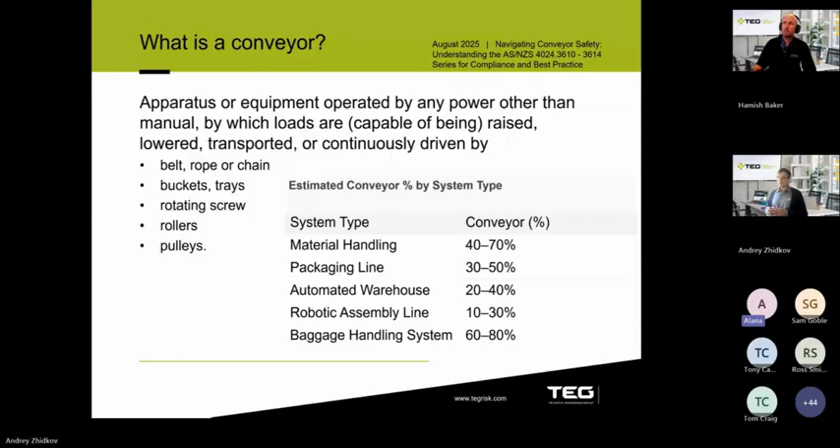Just a brief on the standards, most of you are probably aware. In Europe there's Type A, Type B, and Type C standards, whereas in New Zealand there's Part 1, Part 2, and Part 3. Conveyors fall under Type C or Type 3 standards.

These are the machine-specific standards. In terms of the hierarchy of standards, these are the ones you would typically utilize as a first rule of thumb, or rather, the first measure.

So the standard hierarchy, essentially we're going to be talking around 4 standards. The key one is 3610, which is an overarching standard with all the general requirements. There are 2 standards to be used in conjunction with 3610: the bulk material handling standard, and 3614, the mobile and transportable conveyors.

The latest release of 3612, in rather seismic manner, has been completely decoupled from 3610. Now it provides a bit more detail - we're going to go through each standard individually. The standard, even in terms of the volume of pages, rose from 70 pages to 170 pages within this limit.

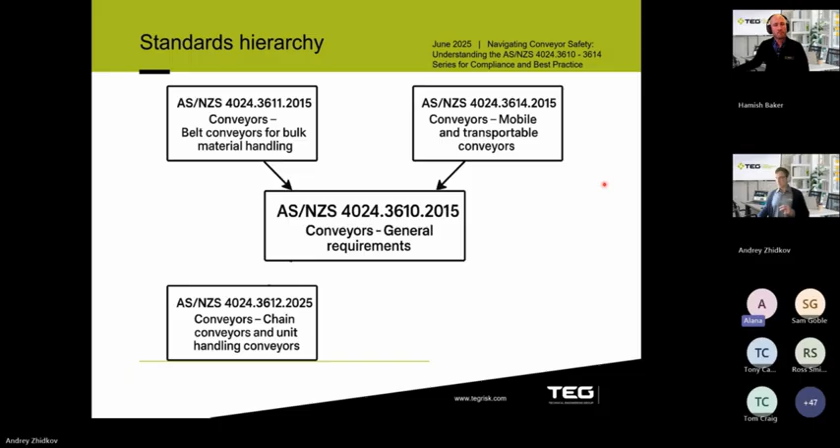So the standard objectives - if we were to utilize 1201, it's essentially achieving the greatest risk reduction, risk mitigation. We're looking at the machinery throughout its whole life cycle: transport, operability, commissioning, maintainability, decommissioning, disposal. And 3610 actually highlights that you have to start off with the risk assessment to minimize the risk as part of the risk reduction.

The persons affected are essentially those in the vicinity of the conveyor. The key here is to involve all parties throughout its life cycle, so all the stakeholders, to identify what the hazards are and all the risk reduction measures, essentially following the 1201 three-step iterative method.

So for conveyor hazards, particularly for bulk material handling, you could find most of it in Appendix D, which has a bit more detail in terms of what the hazards are. You could also go onto the WorkSafe website - there's a topic around guarding of conveyors that also provides some guidance in terms of the hazards.

A recent incident involved a 23-year-old operator carrying out unplanned maintenance, which resulted in the person being killed. This resulted in fines of 800,000 in penalties. It may not look to many that this is a fatal risk hazard, but that conveyor set up resulted in a fatality.

So it just reiterates the potential significance of the hazards we're dealing with. For people with conveyor setups like that, it's definitely worth making sure you have a robust risk assessment in place.

I'll reiterate, we're going to go through this, but essentially, particularly for bulk material handling, the stopping time could be minutes. So if you're reaching through the chain and so forth, even if you can actuate an e-stop, it still takes some time for the rundown, for the conveyor to go from stopping to being fully stopped. That's the key hazard associated with bulk material handling, at least.

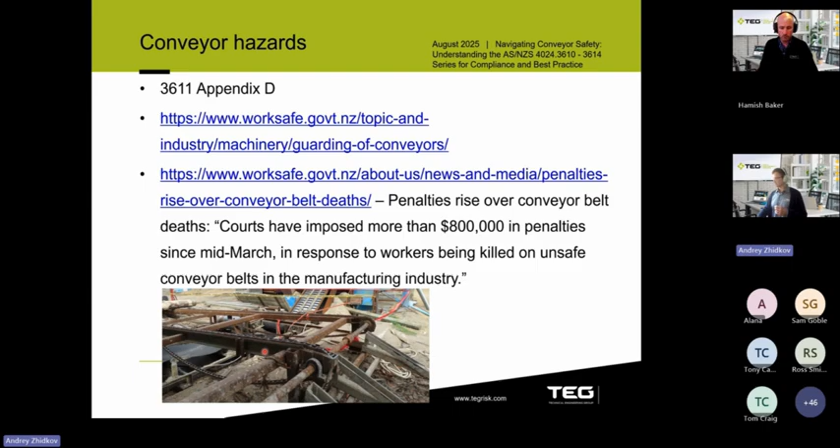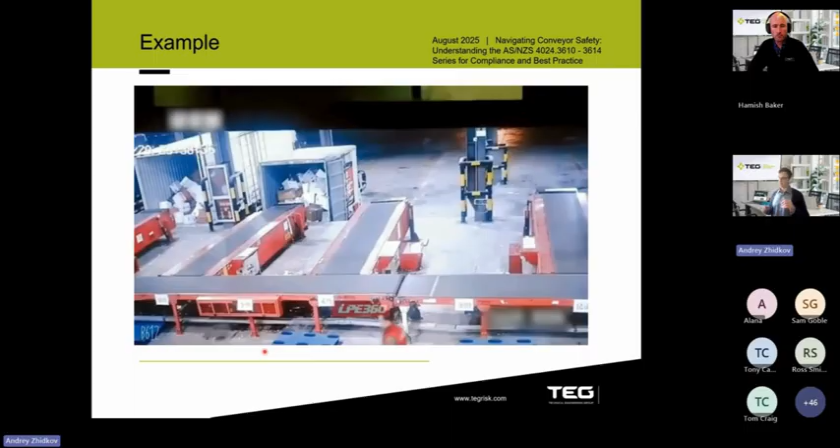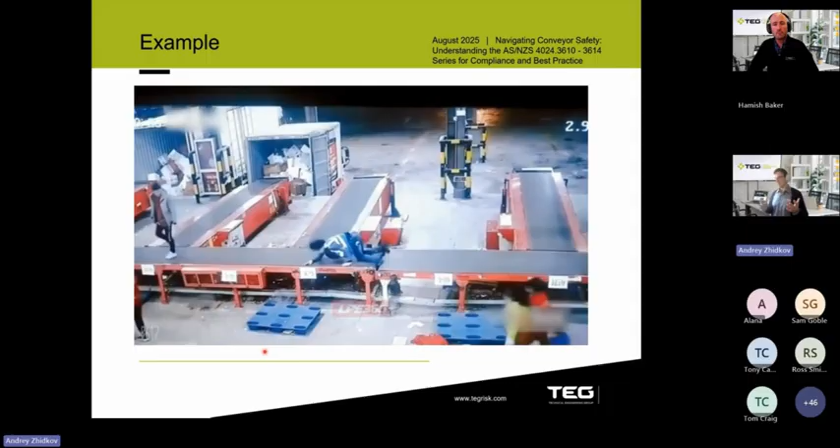This is a bit of a crude example, but essentially you can see two conveyors running towards each other, with people walking near the conveyor. Even disregarding persons walking the conveyor, this could involve loose clothing or long hair - you could see the feet of another person being caught between two conveyors, which could lead to broken bones and so forth.

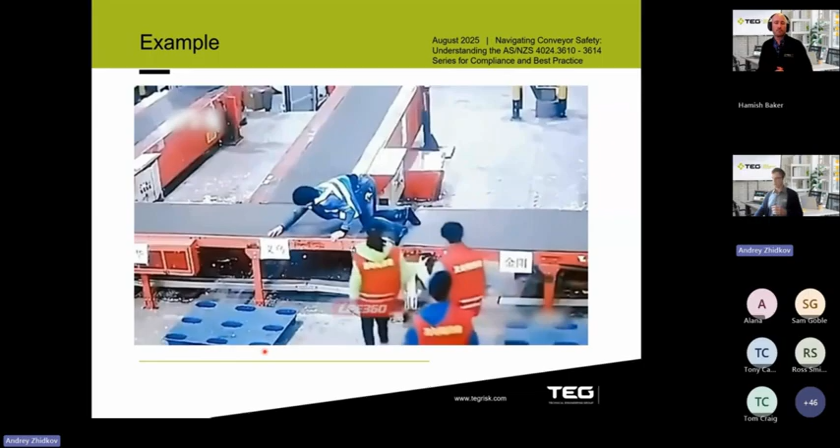So risk mitigation requirements are essentially the same as 1201, as part of the 3-step iterative method. You go through inherently safe design measures, then safeguarding - essentially fit for purpose and preventing access to the danger zone.

The danger zone is any zone within or around the conveyor in which a person is exposed to unacceptable risk of injury or damage to health. That's key to identify, because in further slides we're going to go through the particular risks identified with the danger zones. And the other one is complementary protective measures.

These are essentially emergency stops, pull wires, and so forth. These are the complementary ones. And there are some specific conveyor controls that we're also going to touch on, particularly applied to 3610.

That's all around the startup, essentially warning startup and so forth. And the last one is the energy dissipation and isolation. This is more around the end user. Essentially, it describes what the end user needs to run, any SOPs that apply to an end user.

Sorry, Andrey, I was just going to say to the team here, it's probably one of the interesting attributes of the ASNZS 3610 series of standards, excluding the one that's just come out, is it actually goes into a bit more information on end user information. A lot of standards previously, particularly those of European origin, are more machine builder focused, but there are actually listed requirements in these standards around how end users should operate them safely as well, which is a little bit different.

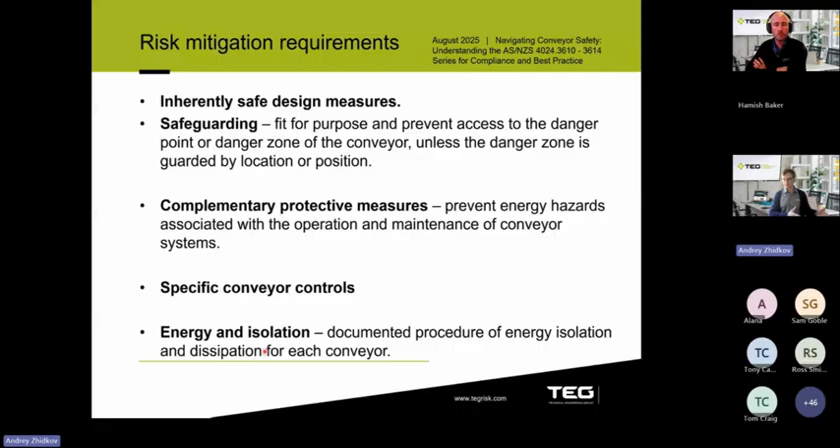So the hazardous situations essentially involve a person reaching into the hazard zone. These are the key ones, associated with the risks of reaching into the danger zone. As per the previous slide, we discussed what the danger zone is, and other parts of the body becoming caught or entangled, or in contact with the danger point.

We're going to go through and describe what the nip or shear points are on the conveyor, and what other measures can be taken to mitigate the risks. You can find all the other hazards associated with conveyor systems in 3610 as well.

I think Appendix D gives a list of hazards, and the point here, which we touched on earlier and want to reiterate, is that they are significant. You can look at arm amputation level, and even, as we showed with that photo before, fatal risk hazards as well, subject to the construction and nature of the machines.

They are certainly not medium level hazards. And then just to add to this, particular considerations need to be made for long hair and loose clothing, as per that previous crude example video.

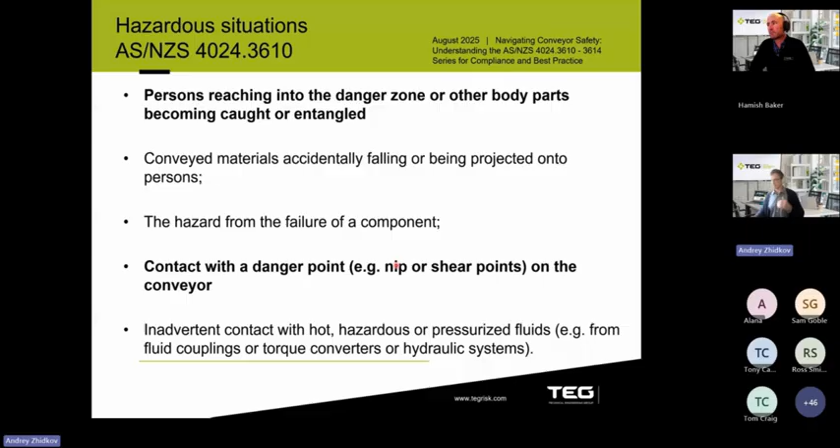So the hazards, essentially nip and shear points: if the conveyor is positioned less than 2.7 meters above any access level, and the gap is between 5 millimeters and 120 millimeters, that essentially creates a nip or shear point. And rotating parts, any exposed rotating shafts and other parts like sprockets, are also rotating hazards, along with gaps and shaft couplings and so forth.

Those two numbers are interesting when we get to the later standard 3612, that's where you'll see some differences. If you clock those numbers, you'll see something different come up later. We're going to go through this as well, particularly around nip or shear points and nip guards, and it will become more apparent why it's important to pay attention to those 5 millimeter, 120 millimeter, and 2.7 meter figures.

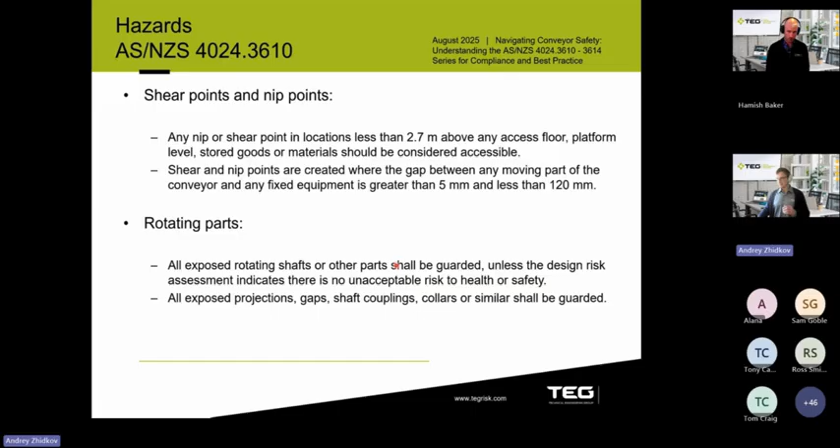So the design of the hazards: obviously restrict access to danger zones where needed for routine activities like lubrication, servicing, and testing. Safeguards need to be designed to minimize reasonably foreseeable misuse or the possibility of defeat in particular. And the guard and protective devices shall be designed to be suitable for the intended use. That's key as well.

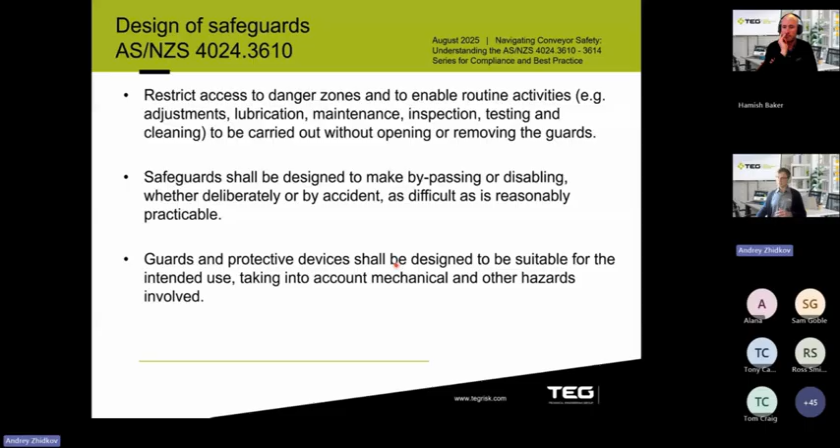These are the requirements and the hierarchy of safeguarding methods. Essentially, the first one you would go for is permanent fixed guards for infrequent access, then interlocked physical barriers for maintenance, operation and cleaning, then removable guards for planned shutdown, and presence sensing safeguarding systems like curtains and safety systems. These are essentially information for use, policies, SOPs, and so forth, that you have in place, along with warning signs and danger signs.

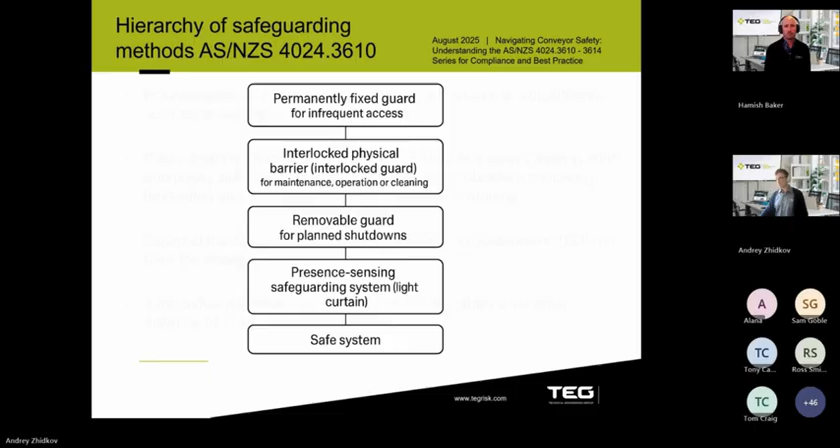The guard design - essentially there are a lot of provisions that need to be made. Guards shouldn't need to be removed for regular lubrication and adjustment, so in some instances you need to look at provisions for placement of remote lubrication points. If you look at chain conveyors with slave drives, you have housing for the slave drives with openings and caps - you can easily remove the caps and access the hazards. So you need to look at remote or distance guards to prevent reaching through into the hazards.

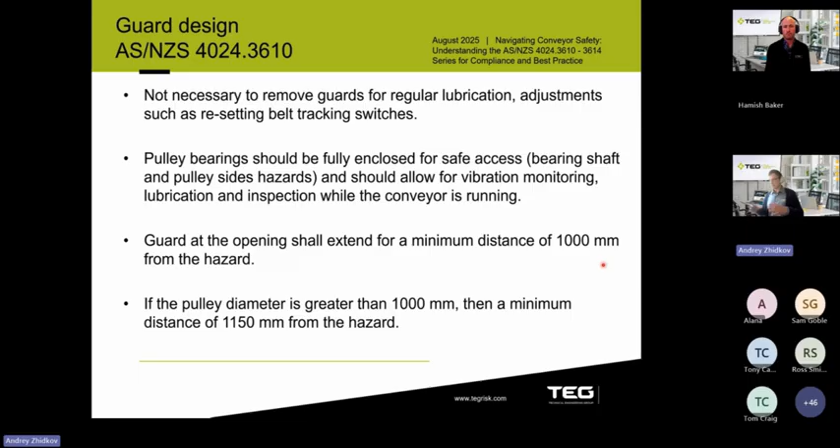Pulley bearings, essentially, need to allow for vibration monitoring and so forth. And the guarding distance at the opening - the key here, the most important part to memorize, is this distance: it's 1 meter minimum distance from the hazard. And if the pulley diameter is greater than 1 meter, then the minimum distance needs to be 1150. You're going to see in comparison with 3612, the latest revision, that there are some deviations being made in relation to 3610.

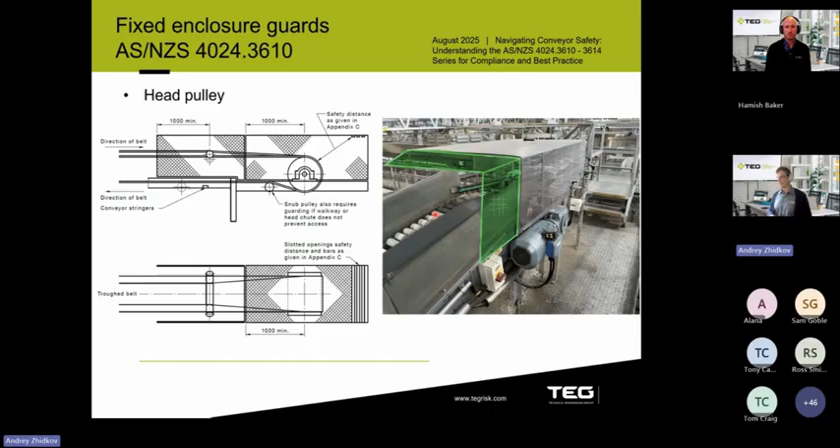A couple of examples: fixed enclosure guards or tunnel guards. Essentially, you can see there are two hazards here, the pulleys, and the guards are positioned 1 meter away from the hazards - you can see this from the top view as well. So these are the locations - essentially that's how you design: you identify what the hazards are, and then you design the guards. You need to look at the opening for other trays and so forth - these are the key requirements here. The same applies to tail pulleys as well, also 1 meter away.

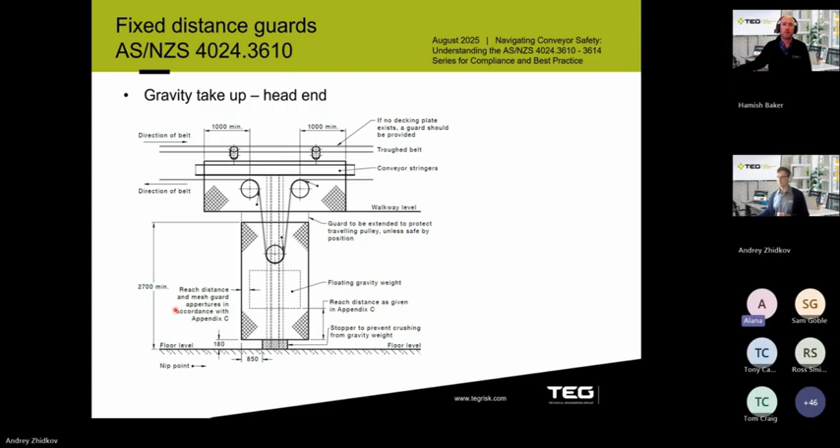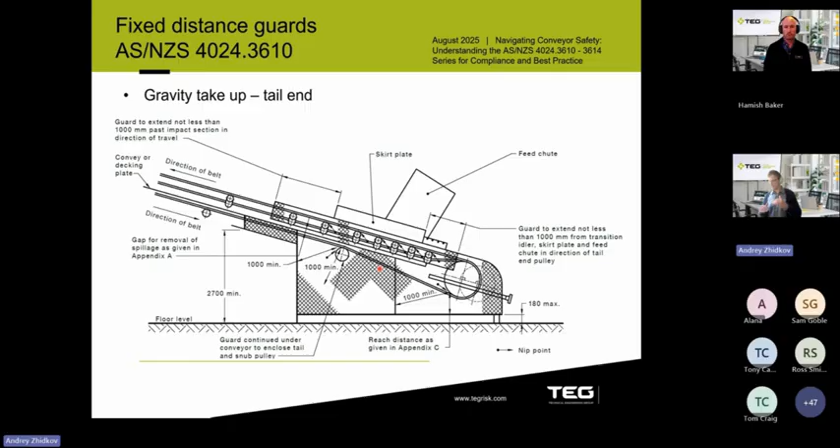Thank you, Hamish. So the same applies at the tail end as well - you can see it's also still 1 meter, and the height of the fixed guards and the gap is also 180. Essentially, you need to maintain this 1 meter rule throughout all your fixed guard designs, as well as the gap from the floor level to the lower edge of the fixed guards.

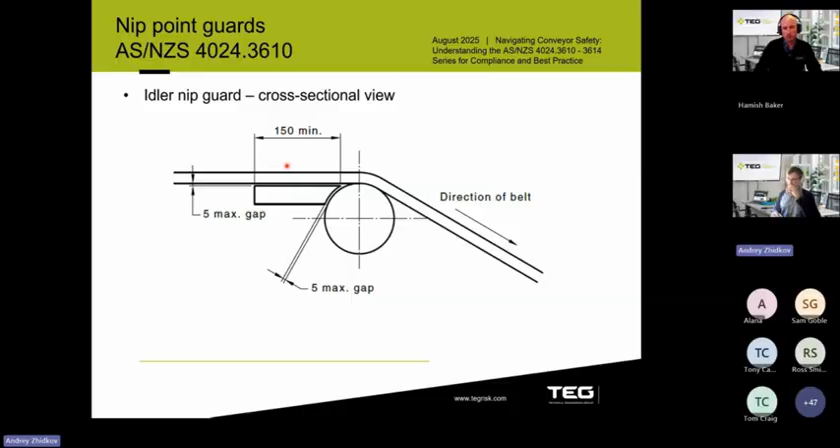Now we get into the nip point guards - you can see the design. Again, we're maintaining this 5 millimeter rule as well. You can see it even provides more guidance on how deep the nip guard needs to be, and we're still maintaining this 5 millimeter gap. Obviously you wouldn't use nip guards for cleated conveyors because they're not suitable for cleated conveyors, as well as for chain conveyors - but we're going to go through a particular example for chain conveyors further down the slides.

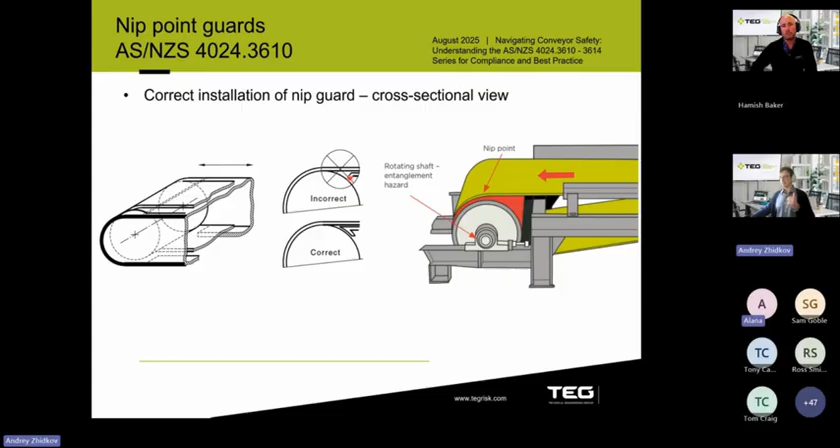And then we can see the cross section as well - this example is from the WorkSafe website. You can see here is a nip point - the conveyor is traveling in this direction, and you can see the shaft, and that's where the nip point is. They show what the correct design for the nip guards is, and what the incorrect design for the nip guard is.

So a couple of examples here - you can see the direction of travel, and you can see the different types of nip guards you could utilize. In this particular example, you can see that the belt is partial width, and that's the key to note, because the belt could be partial width, but then the nip guard is also partial width - so it doesn't extend all the way through the head roller or tail roller.

Essentially, as the belt travels along the shaft and the roller, it could potentially be exposed to the nip point. So in this instance, you would look at using a full nip guard.

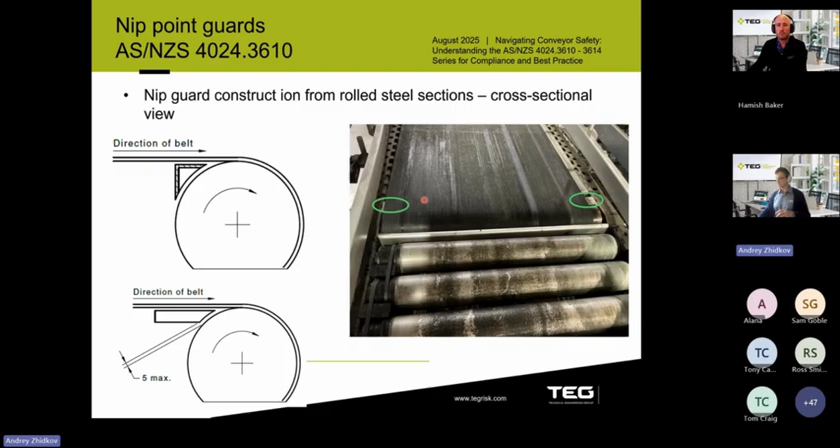So you can see this is an example of not having any nip guards. You can see the belt is traveling in this direction, and that's the nip point. The idea here is to either have a full width belt with a partial nip guard,

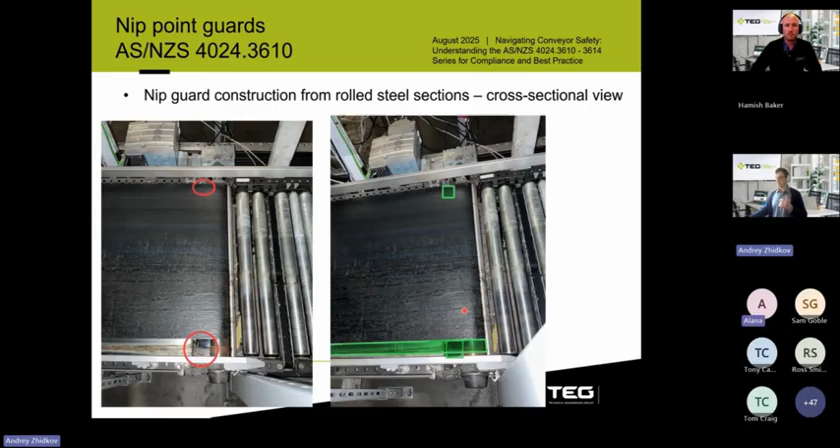or a full nip guard and leave the belt as it is. Then the guard alternatives - the key here is the pop-out, like the standard describes the pop-out rollers. Essentially they need to create a gap of 120 millimeters to allow arm withdrawal, and a 5 millimeter gap here, or using the dead plate.

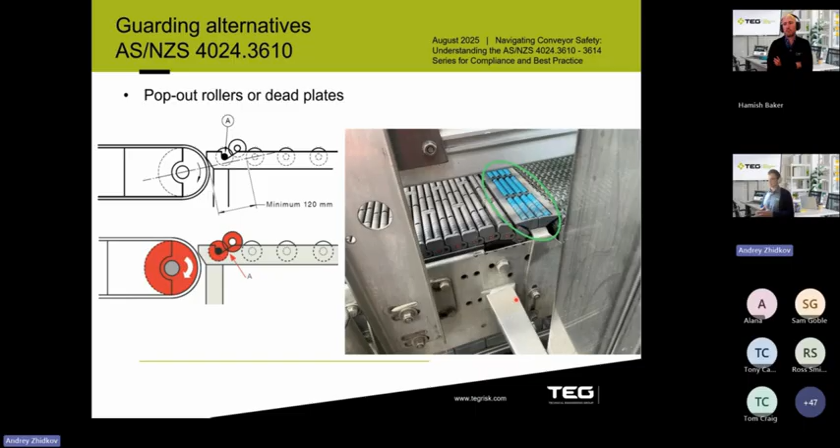But the other thing to note here is 90 degrees - essentially they need to sit perpendicular to the belt. It'll be more apparent when we look at 3612, why 90 degrees is actually different.

So that's one for you to memorize, because we're going to go through and look at 3612 and see what the deviations are there as well.

Emergency stops within the conveyor standards is a really detailed and explicitly set out set of requirements. We'll share the PowerPoints with you, but if you have any sort of decent portfolio of conveyors in your business, or it's something you build or manufacture, you want to make sure you have access to these standards, because there's a lot of specificity in there that we just can't cover in this full webinar.

Sorry, Andrey, go ahead. Yeah, thank you. As Hamish said, this conveyor standard is quite onerous in terms of the emergency stops and the pull wires.

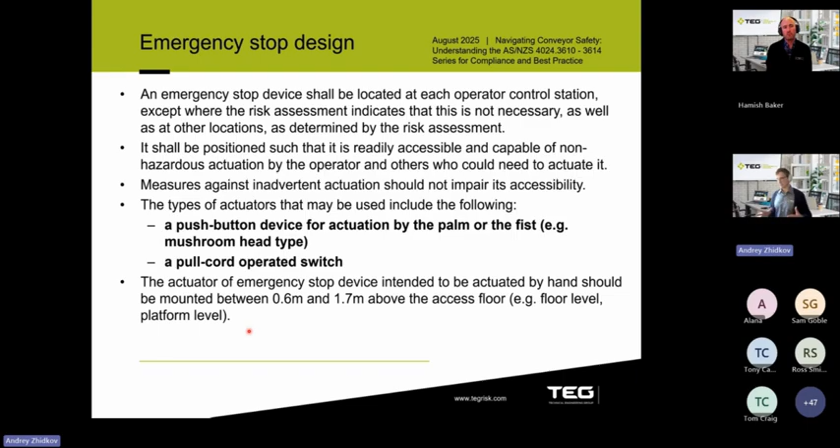So that's kind of highlighting the location of the emergency stops. The most common example you see is for a conveyor greater than 2.5 meters in length and located less than 2.7 meters - they need an emergency stop required at head, tail, and the drive, and at intervals not exceeding 30 meters.

Then there are some other types, like when it's less than 2.5 meters, then only one emergency stop is required. And when the conveyor line is higher than 2.7 meters, emergency stops are required every 100 meters.

You'll see later on why that's the case for the upper limit as well. That's also important for you to note, and every 100 meters as well. If it's higher than 2.7, essentially you need to require an emergency stop. It needs to be readily accessible and visible.

If you're talking about an e-stop at the head, tail and drive ends, if you're in an industry with long conveyor runs, that might not be particularly onerous, but when we go into some processing sites or FMCG sites, there are conveyors going everywhere, and every new conveyor has a head, tail and drive end.

All of a sudden it's like, gosh, we've got to have e-stop coverage everywhere. Now, pull wires might provide some economic means to get there, but it does create real standards and technical compliance issues with trying to meet that geometric requirement of how they're spaced. So yeah, really challenging to conform to that particular standard, in some cases.

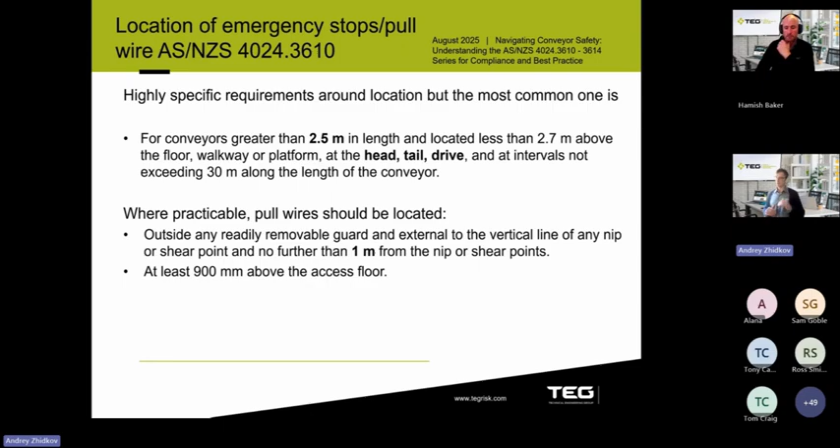In terms of the pull wire location, it needs to be located outside of the readily removable guards, and not located further than 1 meter. We're maintaining this 1 meter as per fixed guards as well, and it should not be mounted lower than 900 millimeters, and generally no higher than 1.5 meters, as we can see here.

We're going to see on the other slide the ideal location of the pull wire, and obviously it needs to be clearly visible. You need to also take into consideration, depending on the run of the pull wire, sometimes you could utilize labels highlighting what this is, a pull wire and so forth. And the pull wire design, that's the one for you to note here.

It will be the pull force, so essentially 70 newtons. From memory, the predecessor of 3610, AS 1755, the pull force was 120 to 140. That's the pull force, but now it's been reduced.

Well, it's been reduced since 2015 to 70 newtons. And the other one is 300 millimeters, essentially the travel distance of the pull wire, and this should not exceed 300 millimeters. It's between the support structures, the maximum spacing. So the other one for you to note is 6 meters, essentially between the pull wire supports, whether you use eye bolts or any form of hoops, but essentially you should maintain this 6 meter spacing. This is particularly to achieve the required pull force and travel distance.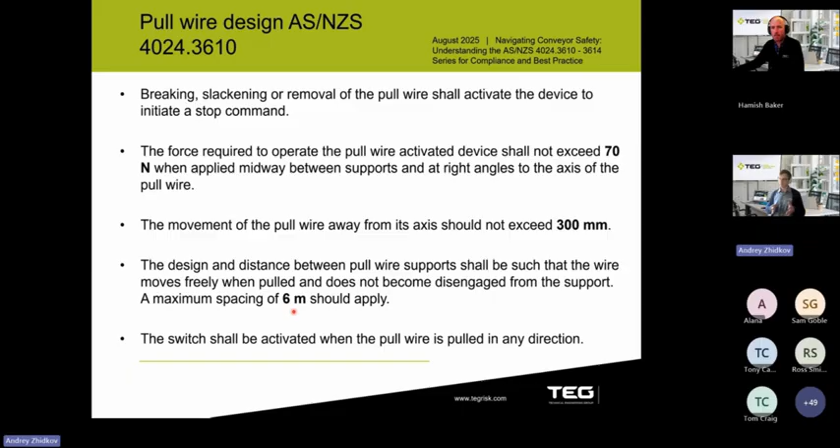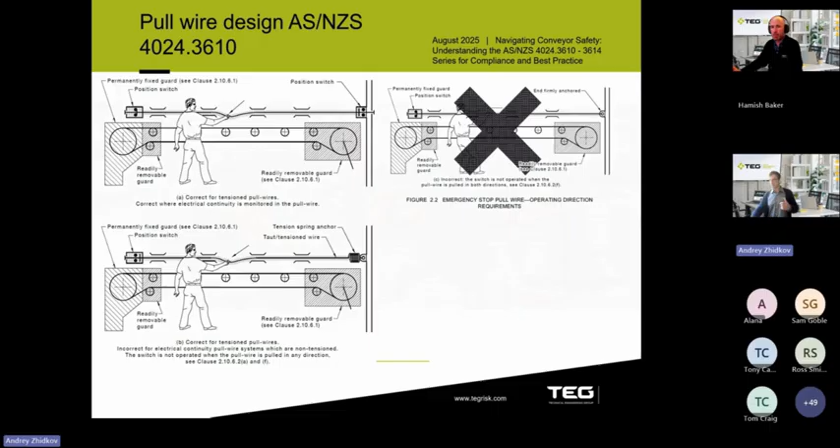So you can see a couple of examples here. We have 2 switches on both sides, or there's going to be a tension unit and the spring, and that's the incorrect mounting. You can see there is a firm anchorage. The downside of this is, as you can see here, if you were to pull the pull wire, you will have to actually undo the tension unit and then reset it, and it becomes quite cumbersome. This discourages operators or personnel from actuating the pull wire, because it's quite a rigorous task to reset it.

And then this is around a 12 meter run, and then there are no supports here. That's essentially where you would probably say that the travel distance and the pull force of 70 newtons is not maintained.

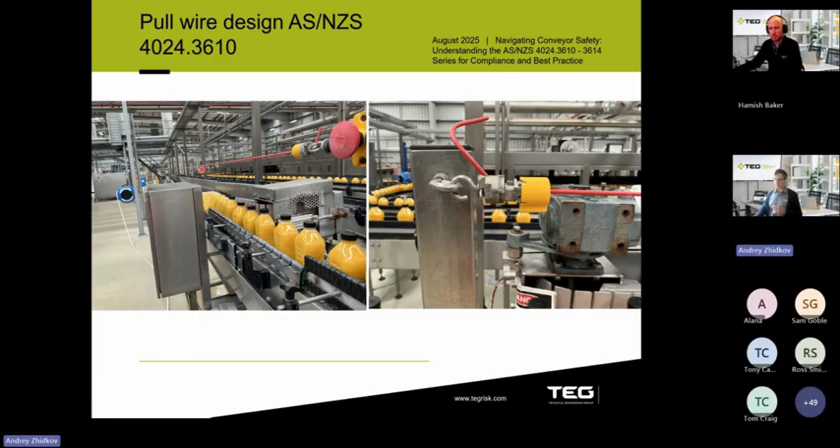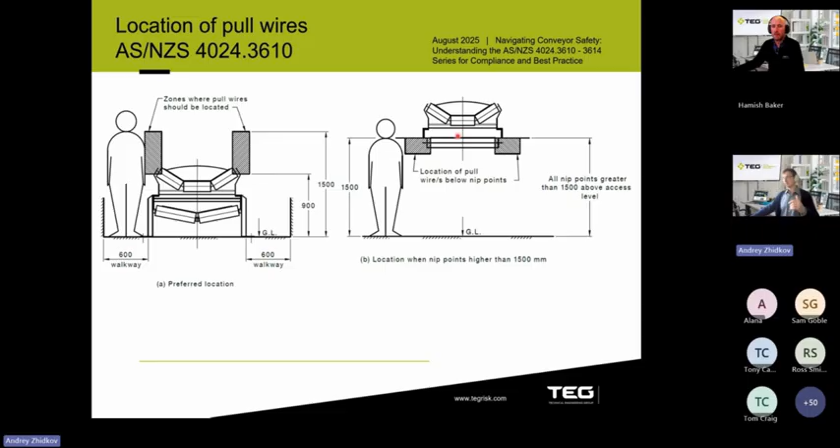So that shows, as previously discussed, the height. Essentially the lower one is 900, and you need to mount the pull wire between 900 and 1500. And when the conveyor is higher than 1500, you mount the pull wire lower than the conveyor line.

Conveyor controls, that again comes down to the end user. The key here is around having uniform start and stop controls. You may look at the conveyor starting and stopping at the same time, but then you don't take into account that there's a conveyor group starting and stopping simultaneously. But then as part of the cascade stopping and cascade starting, that's where the nip shear points are created, and that's what to consider. Sometimes they start synchronously, and therefore there is no need for any form of nip guards or safeguarding. But that's a really good point there.

I think there's one question that Alton asked, and I think it's maybe timely to bring it up. It was around, do we still need e-stops required at head and tail end if the nip point is guarded?

Andrey started talking about a point there. You might actually have 2 conveyors, and do they start synchronously or not? It may not be as simple as that, because you might have 2 conveyors with slightly different belt materials, which creates different differential forces. One travels in, the other one might start later, so it pulls in a force that way. So that alone may create that hazardous situation that might require e-stop protection.

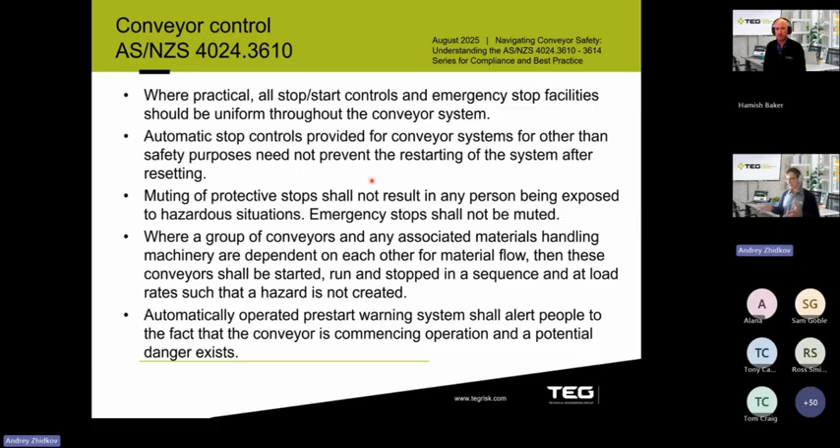I don't know if you want to add to that particular question from Alton, Andrey, around the wording in 3610, and we're going to get to 3612 later on. But in terms of e-stops at head and tail end under 3610, are they required if the nip points are guarded? Yes, that's what it says, it says 'shall be'. So essentially, even though they're safeguarded, you still require them. And the other one is the pre-start warning system as well, to alert the people, which is very onerous, as we touched on before. But we'll get to 3612, which sort of sets the cat amongst the pigeons.

So energy isolation, that's the other one. Essentially it's more of an end user requirement for the isolation. So essentially, for any form of maintenance, inspection, or servicing, that's when you need to perform any lockout, tagout procedures.

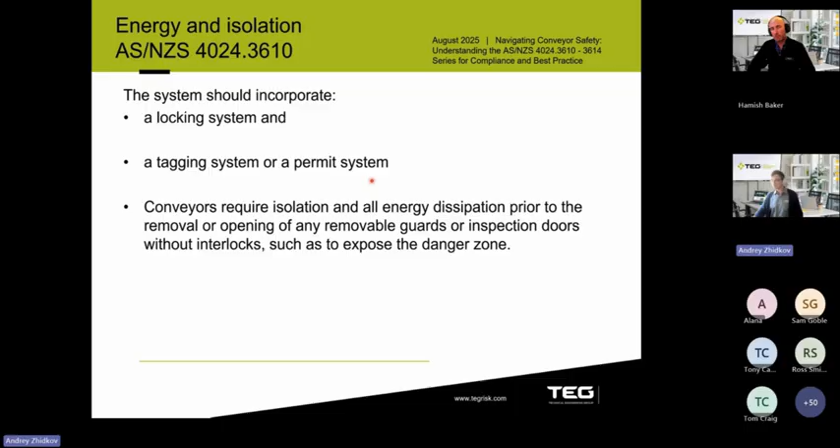So maintenance management essentially comes down to the end user. These are the periodic tests and inspections. You need to make sure protective guards are functional, typically carrying out tests in accordance with manufacturer recommendations. Also check for undue accumulation of spillage and excessive rubbing. These are periodic inspections you need to identify as part of your procedures, including making sure pre-start warnings are functional, and the noise as well.

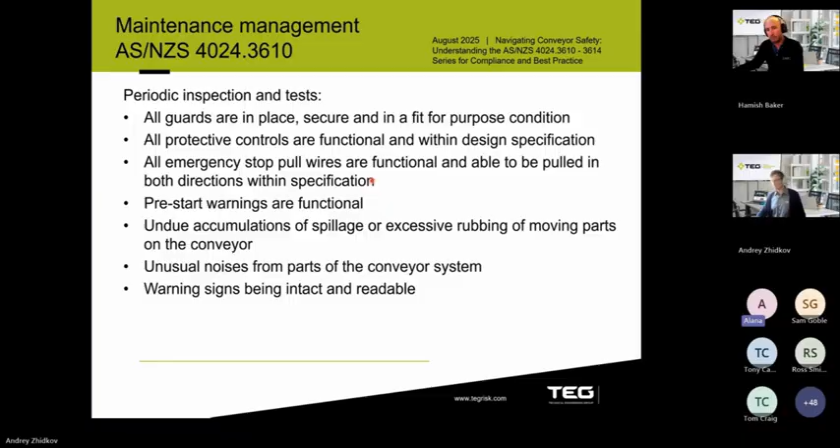Going back to that point, it's interesting to consider that this machine safety standard is actually telling the end user, which is unusual for standards coming out of Europe, but this was Australian developed, the inspections and tests you should be doing on your conveyors. It's almost starting to move towards a code of practice, saying these are the things you should be checking, and it's quite specific. Some are relatively generic, but there's a whole bunch of things there, so I would put some relatively onerous compliance points on there. That's something for you to consider if you want to achieve compliance with that standard. Something a lot of people don't appreciate about that standard.

So the next standard is around bulk material handling. What is bulk material? Essentially coal, ores, grains - these are the bulk materials. All bulk material handling introduced the need for conveyor safety standards. Most of the mining standards, 3610 and 3611, 12 and 14, are essentially derived from mining.

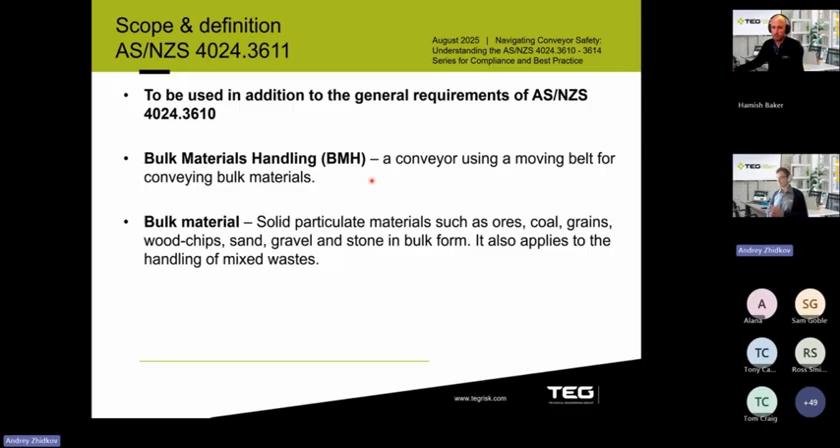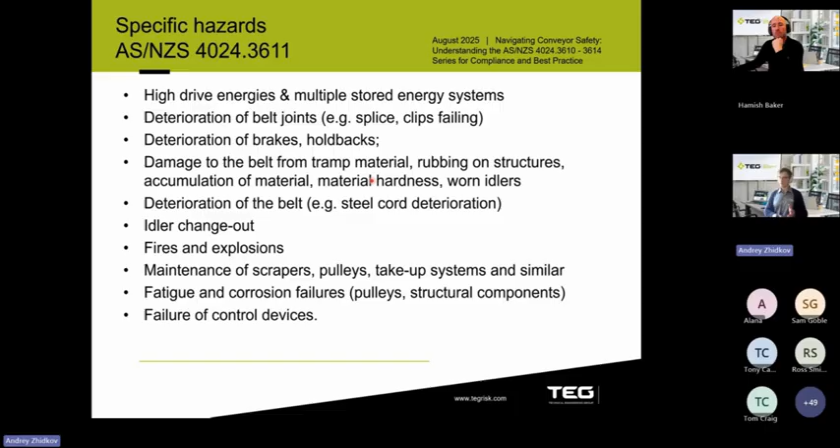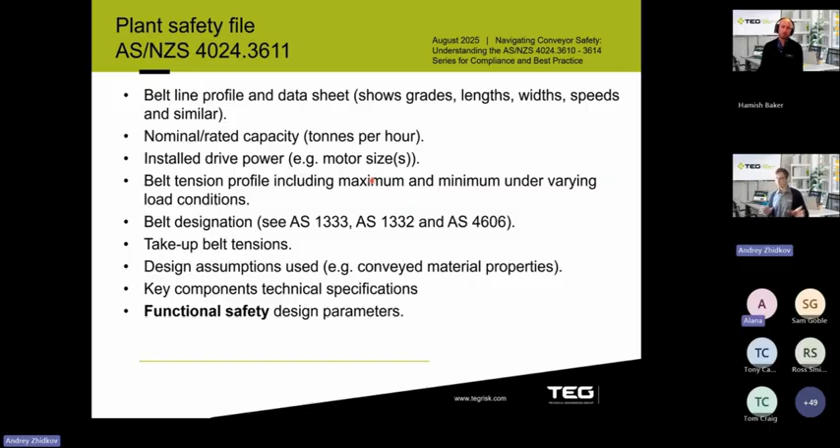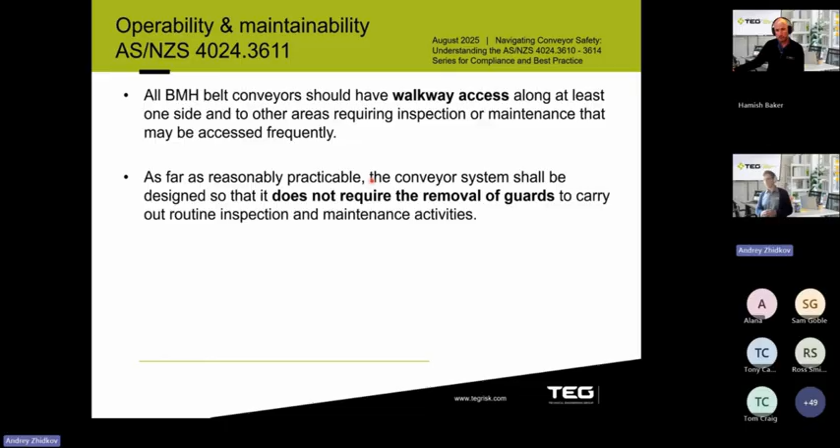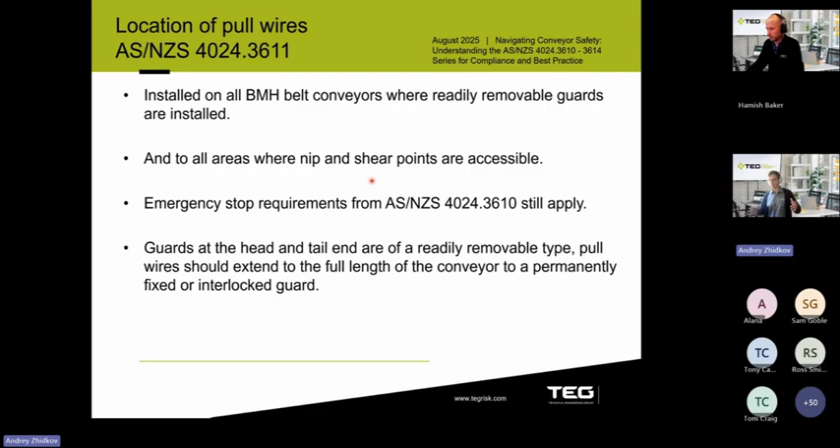Location of the pull wires - essentially the emergency stop requirements still apply from 3610. Because of their head and tail, they typically require removable guards. So if you were to use a pull wire, that's when you would stop prior to that on the permanent fixed guards or interlock guards.

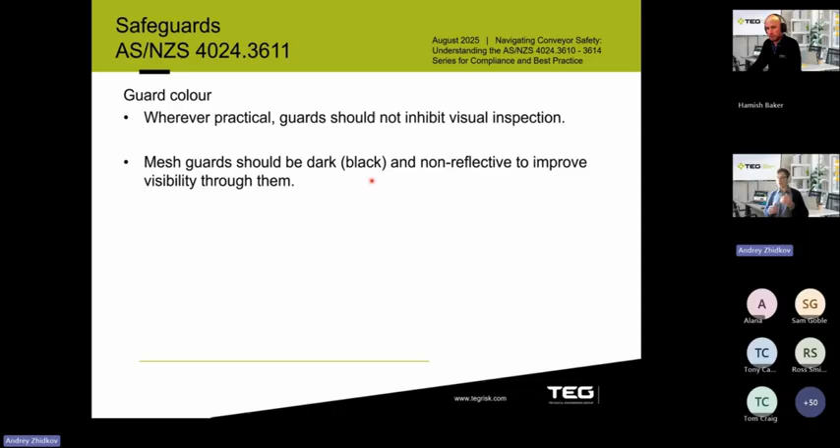Safeguards in terms of perimeter guards - obviously that's still the same as per 3610, using black mesh and providing contrast colors for viewing purposes.

Nip and shear points - essentially the key culprit here is the pulleys, because as we saw previously, that's the cause of death of a person. We'll go further down the slides and see what caused the most deaths to personnel.

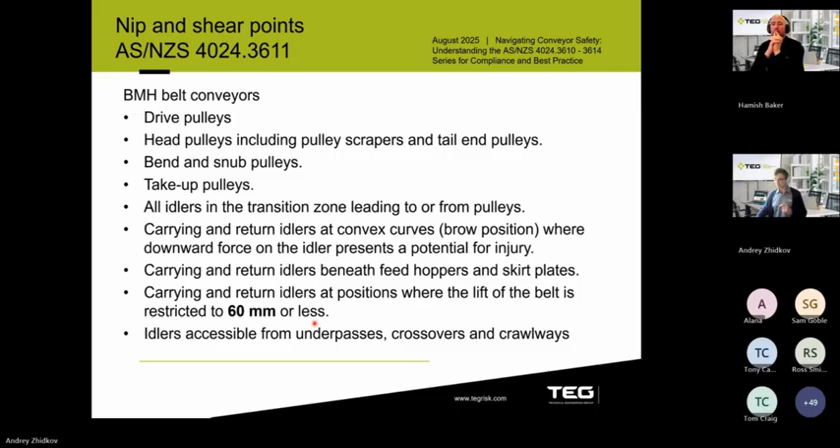The other thing to note here is the 60 millimeter rule for return rollers or return guides. The belt gap is restricted to 60 millimeters or less, and that's when you need to provide some form of underside guarding - or it isn't required by design. So if the gap between the idler rollers or guides is greater than 60 millimeters, then there is no need for underside guards. This is all around the design of the return rollers or idlers.

So these are specific hazards. If you look at the 3610, it's all around - there's a lot of around zoning. So if you split the zones, essentially that's the guarded by location. Zone A is guarded by location, whether it's located at height or outside of the building, so there's no requirement around safeguarding it. Whereas Zone B is within the access area, so that's when you need to look at implementing some form of safeguarding.

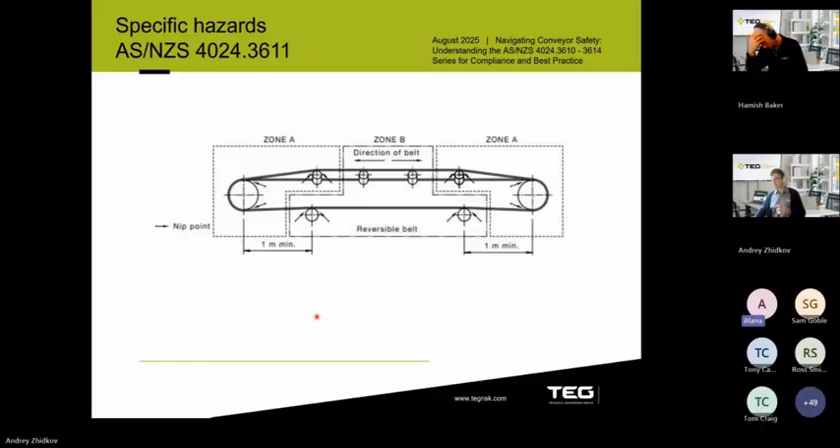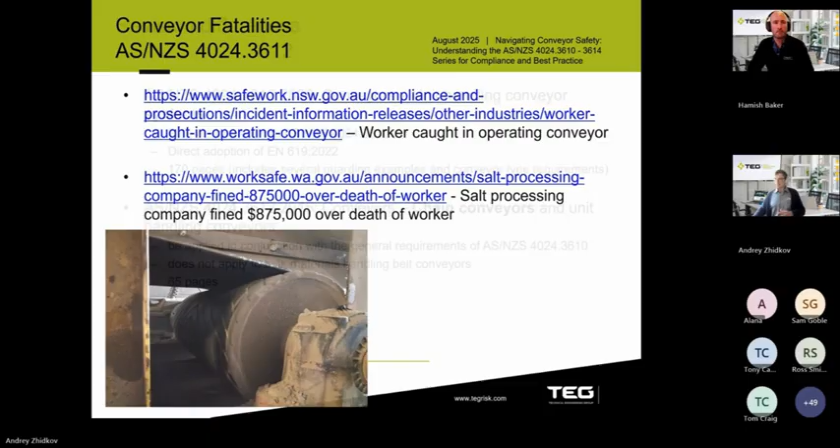Now we're getting to the latest revision of 3612. You can see this standard has now been fully decoupled from 3612 and 3610, and it's a direct adoption of 619. It now contains 170 pages versus 65 pages - nearly tripled in size - with a lot of examples, even examples of safeguards, like the location of emergency stops, even for the carousel, showing you where to position the emergency stop.

I think this is a really big change that's come about. My inference from conversations with a couple of people is that there's going to be changes to other conveyor standards as well, because at the moment it creates tension. We previously had this hierarchical structure with 3610, 3611, 3612, and 3614, which all fed into each other and were read in conjunction. Now there's this new standard that stands on its own, so it will create some tension between those. I don't know fully what the ramifications are going to be, but my guess is these other standards - whether general standards or bulk material handling conveyor standards or other conveyors - may see changes too. It's definitely a space you want to be monitoring. We'll do our best to keep you abreast of any changes through blogs or other bits and pieces as we identify them, but it's definitely a space to watch.

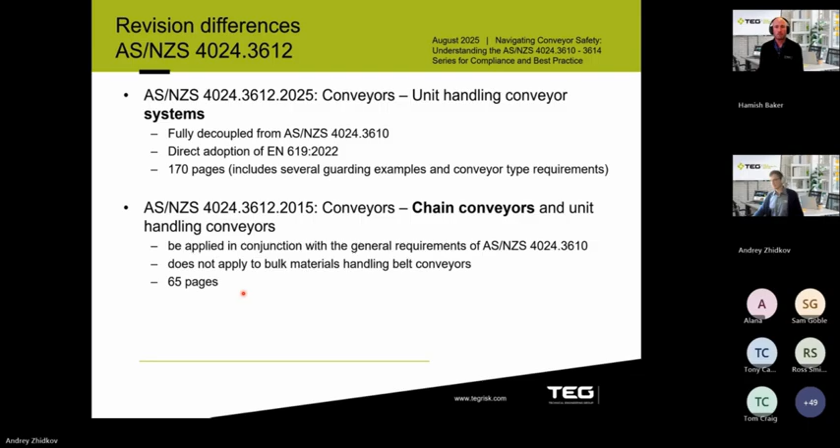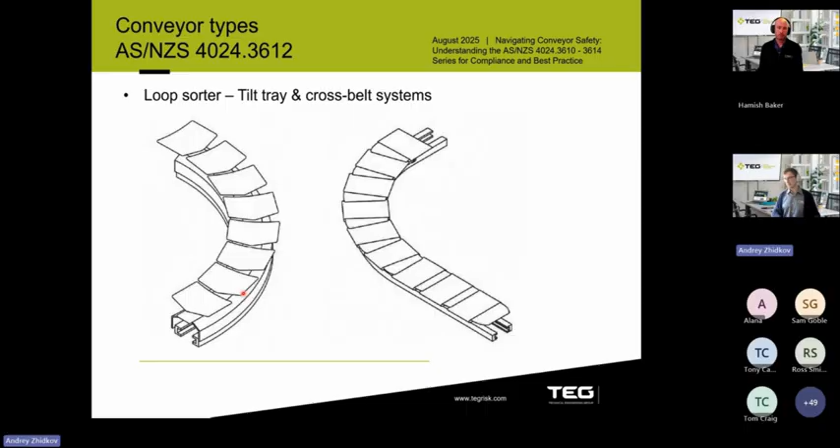Just as a prediction - a couple of examples of conveyor types: tote conveyor, loop sorter, tilt tray, cross belt system. You particularly find these in parcel handling, or even BHS or BTS systems. Line sorter, also known as a shoe sorter - there are also examples, even the safeguarding shown for this type of sorter.

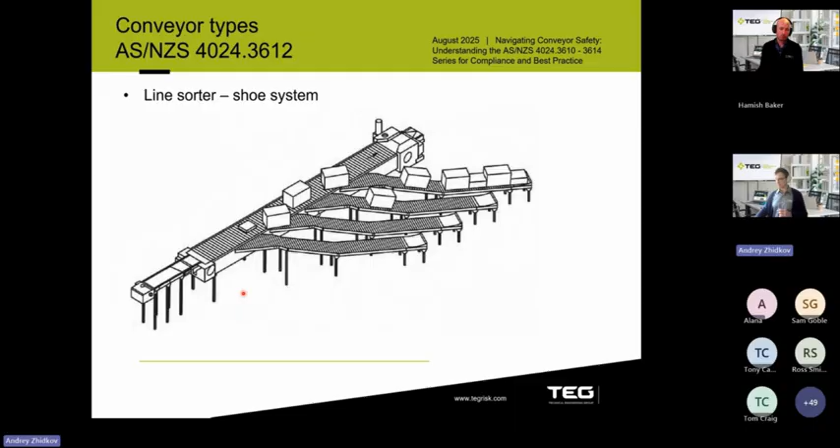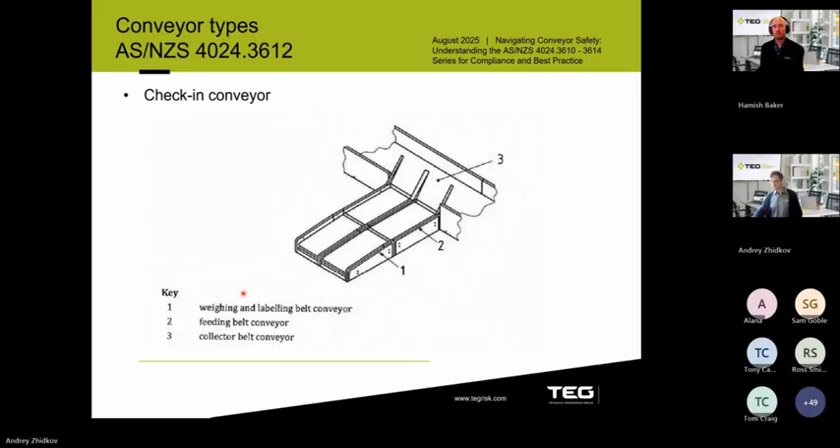Check-in conveyor as well - we're going to look at particular nip points, there are certain examples, and the gap also being reduced to 3 millimeters. When you say check-in conveyors, you're talking about at the airport? Yeah, at the airport, checking your bags. Obviously you have a check-in conveyor, labeler, induct, and the collector conveyor. The other one would be the reclaimed baggage carousel as well - you could also find it there.

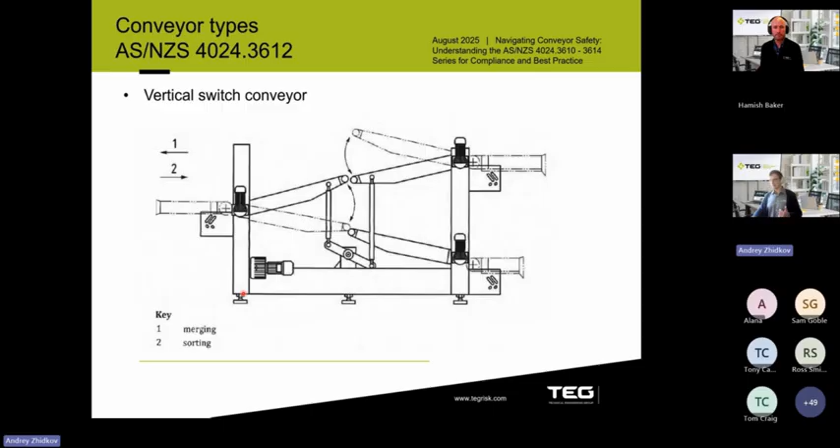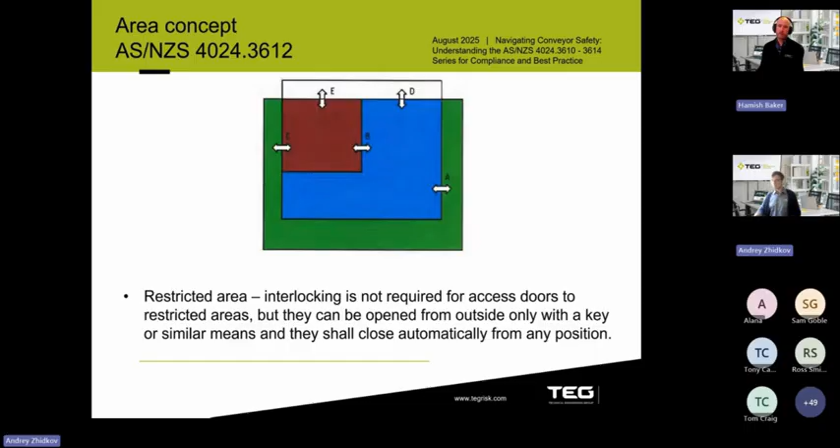And there are certain requirements applied to each area. As an example shown below, the restricted area interlock is not required for access doors. So if you clearly map out on your drawings what the areas are, it will probably help you reduce the number of safety devices you require for certain conveyor types. So a lot more specificity coming into the standard.

Yeah, 100%. And the other one in terms of the guards, now there's a blanket rule of 2 meters for the fixed guards or distance guards. For any fencing, the distance is 2 meters high. This is essentially the measurement against climbing over a guard without using the available means. And the next one to note, you can see the gap between the lower edge of the fixed guard and the floor is 240 versus 180 as per 1801 or 3610.

And another change that actually, I guess, is less onerous. It's gotten more specific, but it's actually become less onerous than what 3610 had.

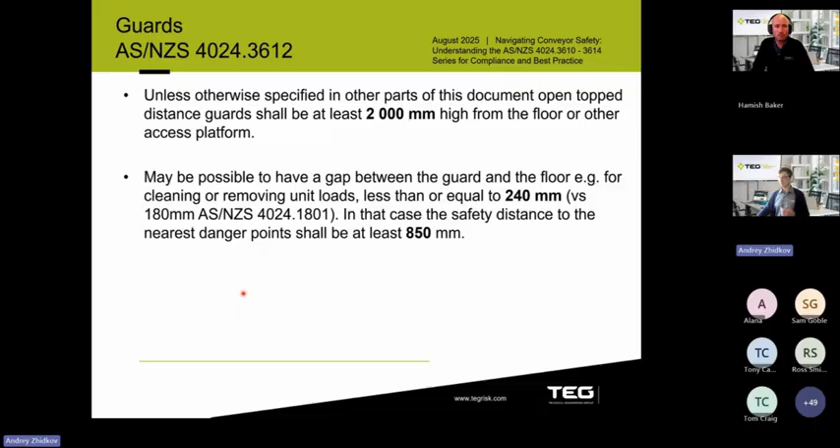Yeah, and then now the safety distance has been reduced from 1 meter to 850, the arm reach essentially, compared to 1 meter as per 3610. So that's the protection against moving parts. You can see now that the approach speed has been reduced from 1600 to 800. This is essentially in line with EN 528. That's for the ASRS system, and the same applies for the aperture height as well.

So essentially, the height of the aperture can be realized using tunnel guards. If you were to apply it correctly, it actually minimizes the use of light curtains or any safety scanners.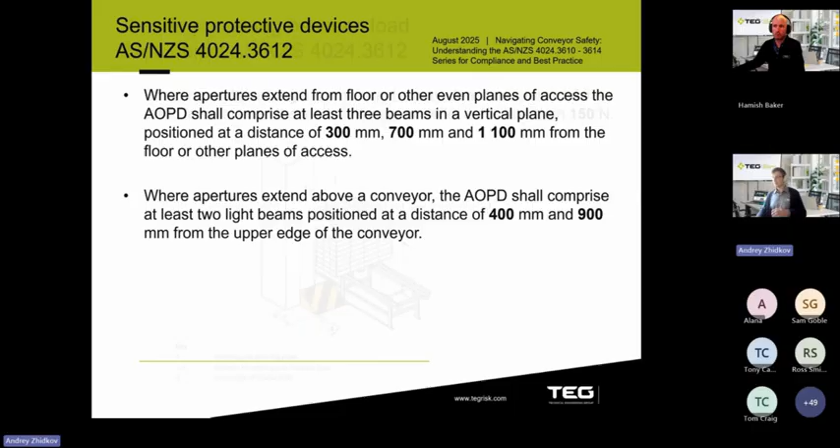And then there is also more guidance around shearing and crushing between fixed load and fixed objects. So you could utilize something similar to the sloping plate, as long as the deflected force is less than 150 newtons.

So just another example of a lot more guidance and specificity around control measures. That may provide really useful value to those out there trying to resolve some of their compliance issues around conveyors.

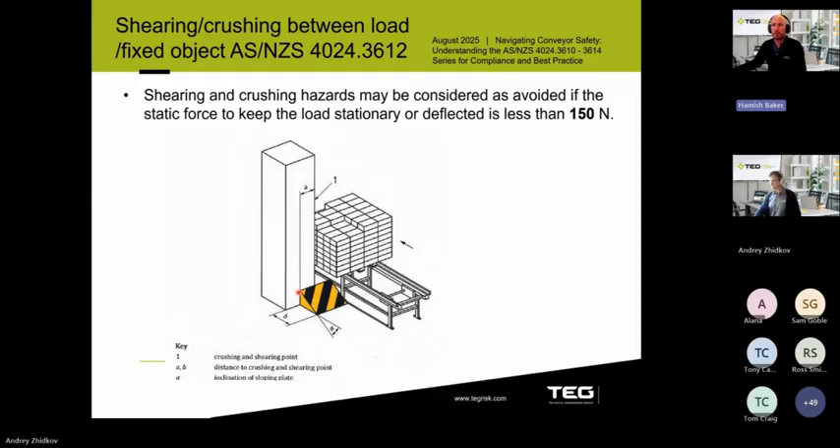Sorry, I know it's 12:45. Andre, I keep jumping in and ruining your time. No, that's all right, that's all right.

Now you add into this, and then now we're talking about the drawing-in points. You can see it's still 5 millimeters, but now they've introduced the angle - it was 90 degrees at least when you use the dead plates, now it's not 90 degrees, now it's 80 degrees. And now you can see that the gap has been reduced. Like the nip and shear points created, as per 3610 was between 5 millimeters and 120, whereas 3612 is 5 millimeters and 50 millimeters.

So essentially, it's a bit more manageable for you. You have that gap, and as long as you maintain it, like if it's less than 5 millimeters or greater than 50 millimeters, then there is no need for any form of safeguarding. The same applies, 50 millimeters, for the pop-up rollers as well.

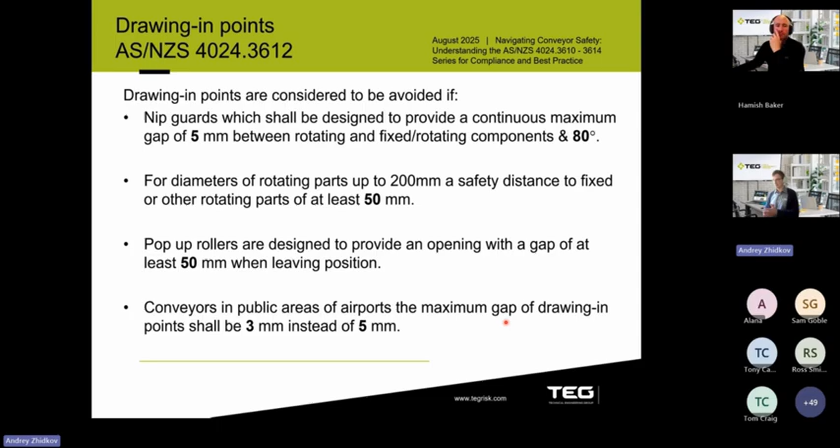And then for conveyors in public areas of airports, now the maximum gap of drawing-in points has been reduced from 5 millimeters to 3 millimeters. So again, it's more specific for certain conveyor types.

So the emergency stops, we spoke about the workplace. Essentially, if you identify all the workplace, then you can see that emergency stops are not required, as you can see the last point, not required at the head, drive, and tail ends.

Now it should not exceed 5 meters, but if it's a straight conveyor line, then it's a 10-meter rule. And now the mounting height has been increased as well, from 600 millimeters to 1.9 meters.

And there are some exceptions being made for the location of emergency stops. Essentially, you're not required, according to this standard, to have emergency stops for the baggage carousels or reclaim loops, and where the conveyor is lower than 0.6 meters.

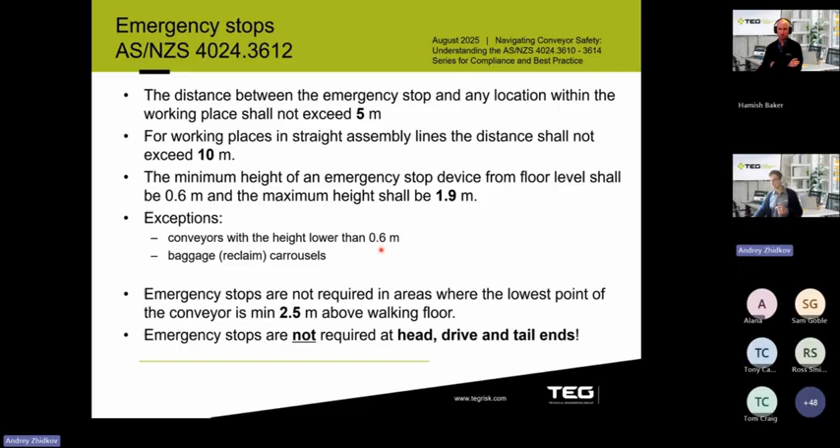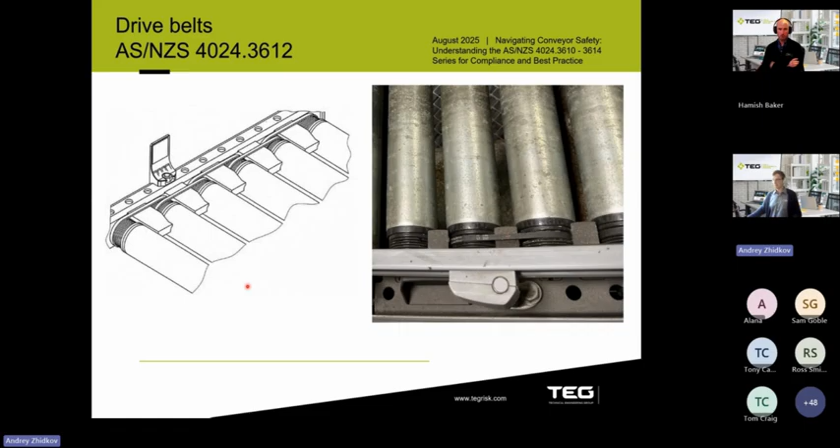So a couple of safeguarding examples. You can see that for roller conveyors and the drive belt, essentially you use fixed tapes between two rollers that prevent any nip, shear points, or entanglement.

And then that's the chain conveyor. You can see the chain is inside the U-shaped bracket. So obviously you wouldn't be using any form of nip guard here because of the sprockets.

I'm going to quickly touch on the mobile and transportable conveyors.

Just before you do, Andre - so for 3612, pretty big changes. Before we go on to 3614, probably what I would say is if you do want to make use of 3612, because it might be easier to demonstrate conformity or compliance in your situation, I'd be really careful to make sure that you have really clear scope alignment between 3612 and the conveyors and your particular situation. And like everything, make sure that's backed up by a good risk assessment, because just because 3612 might have less onerous e-stop provisions from a spatial geometric requirement, there may be attributes with your machinery and how people interact with it across the life cycle that mean you have special safety arrangements that need to be put in place. Sorry, Andre, there you go.

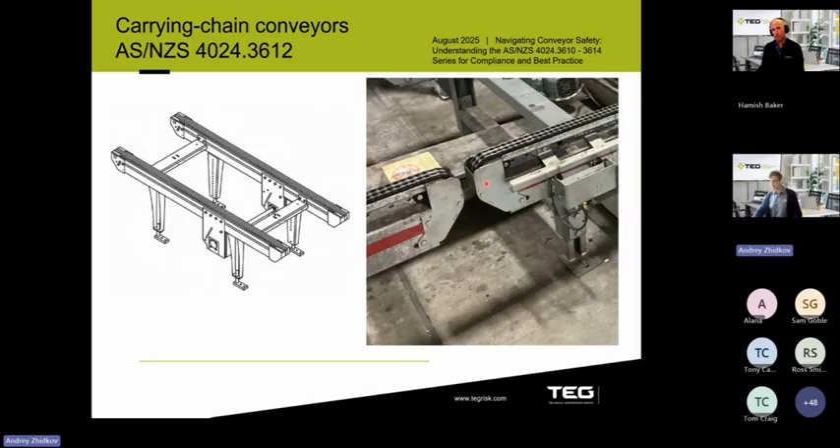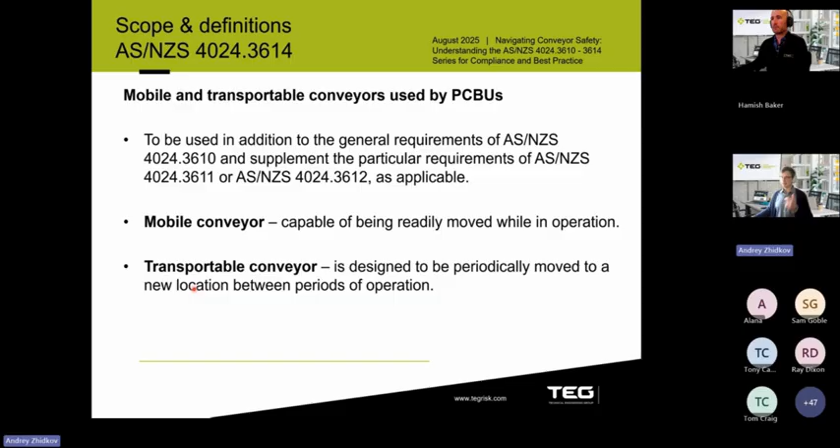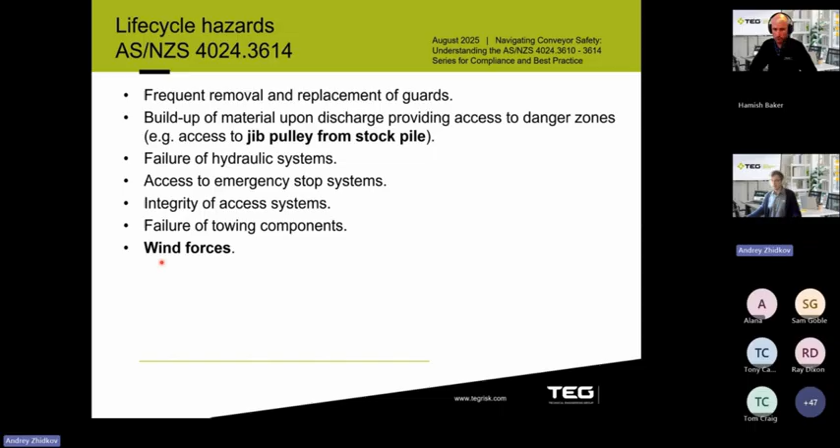So the characteristics you could also find in the standards highlighting which conveyor is for which type. And life cycle hazards - the key here is build up of material upon discharge, providing access to danger zones. So jib pulleys from stockpile, and the wind forces to consider.

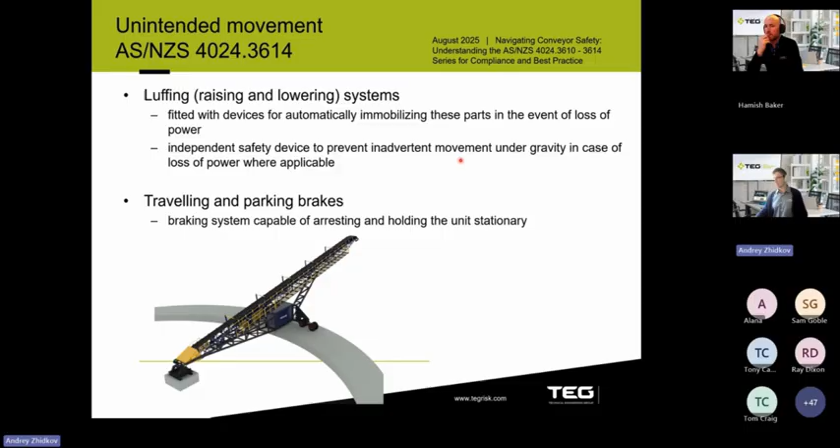And unintended movement, so we're looking at the luffing conveyor or rising and lowering system. The example below - essentially you need to immobilize in the event of a power loss, and you need to prevent any inadvertent movement under gravity, and also the brakes.

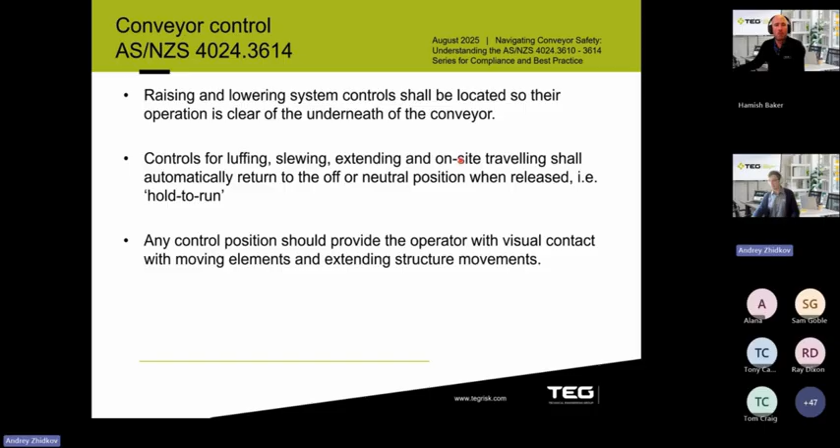Conveyor controls - the key here is to remember hold-to-run, and it needs to be clearly visible as well. The area needs to be clearly visible to see that no one is underneath the conveyor. Emergency stops - it's essentially the same as 3610.

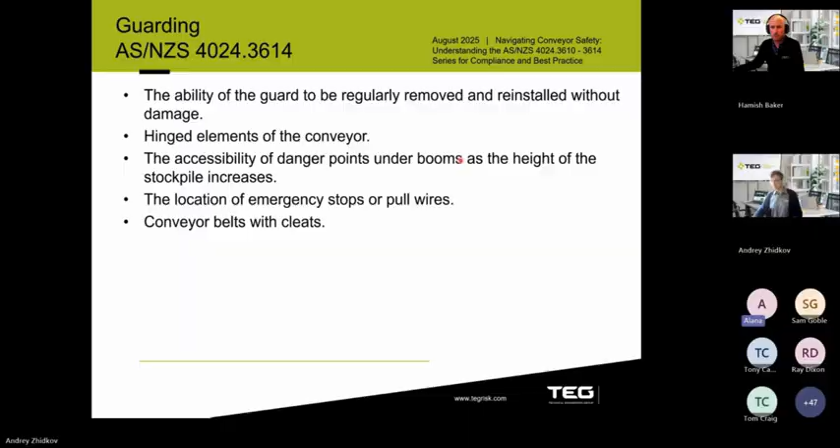And the guarding - again, for the cleats, you wouldn't be utilizing any nip guards, just to reiterate that point. Interlocked removable guards essentially installed as per 3610, and they do not automatically restart when the access gate is closed.

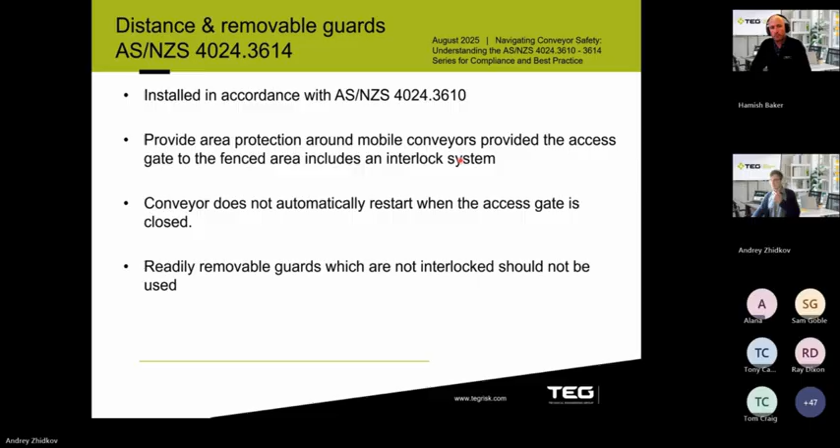So the key takeaways: essentially 3610 is the overarching standard for conveyor systems. The other one is that 3612 is now a direct adoption of EN 619 and being completely decoupled. Safeguarding examples can be used as guidance to support your risk reduction, particularly from 3612 - it now includes a lot more examples. And the last one, probably the most important, is a robust risk assessment, utilizing the iterative three-step method: inherently safe design, safeguarding and complementary protective measures, and information for use.

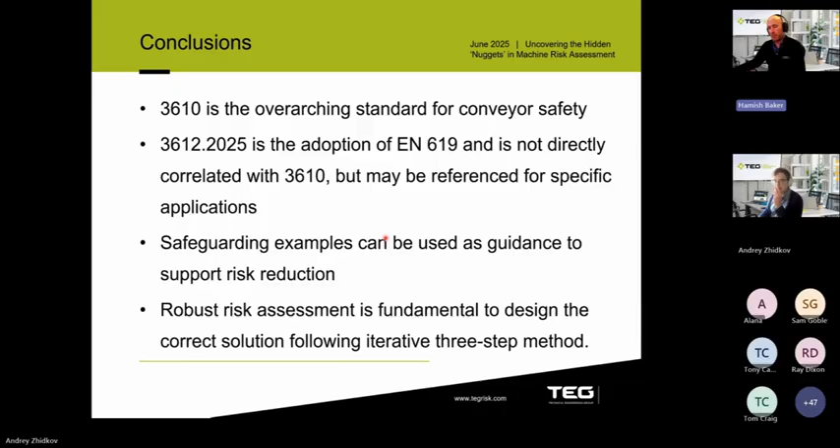We've got 10 minutes left, which hopefully is perfect to address some of the questions, which we don't have too many here. We've got a question here from Greg Patterson: we've got pre-start alarms, we've muted many in our rooms due to the number of alerts - thoughts on this? I know what some of your rooms look like, Greg, and how many zones and conveyors you've got, so I completely understand the challenges that you have there. And, you know, within process safety, alarm management and alarm fatigue is very much a thing that needs to be addressed.

So I can definitely understand why you've done that. I think probably the key thing there is good risk assessment to understand which conveyors might be started without some sort of pre-startup alarm. Are there certain lights you could fix in place of it? What is the level of risk associated with the conveyors? If they're really inherently safe with good design, that means there's less of an issue with turning off some of those alarms. Also, where are the start-stop locations for those? Do the people that start the conveyors have good visibility of the area and control so they can see? Whereas we have lots of blind spots with conveyors that extend into unknown areas, that might be another factor you bring in. I don't think there's any clear or quick answer to that one. I'd say it's going to be based on your situation, your risk assessment, and some of the conditions specific to that.